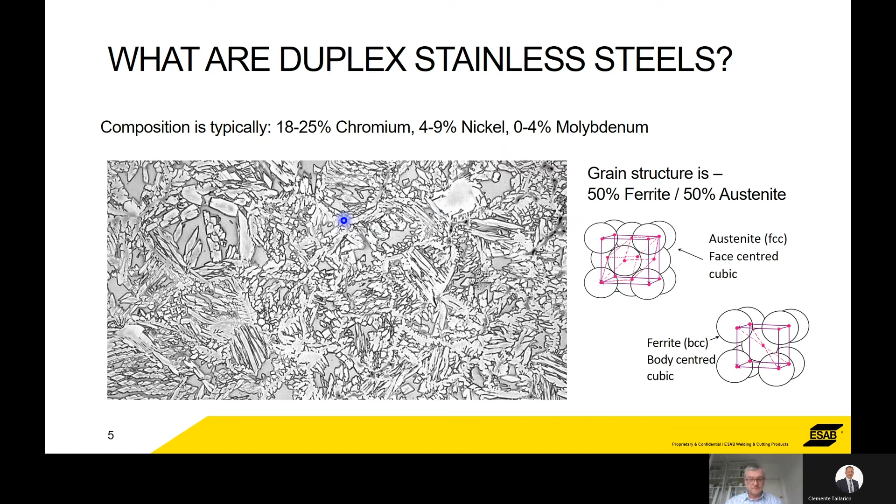We see some photographs of the effects of pitting corrosion later on, and it's a good illustration of what happens basically. So you see the measure of PRE, we start off with these things called lean duplex. Lean duplexes were invented because they didn't have so much nickel in them. When nickel was really expensive, someone developed duplexes with not so much nickel. So these are lean duplexes that have got a PRE number below 28.

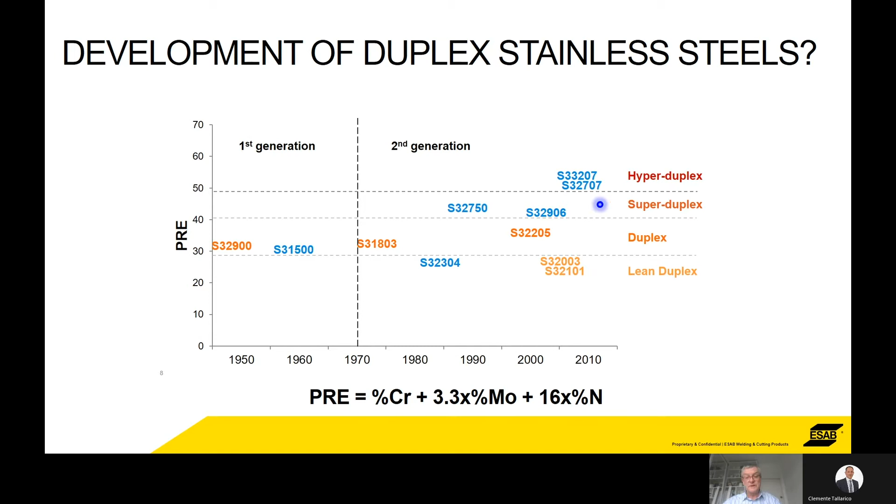And the difference between these, the higher that you go up the scale, the more resistant these things are to pitting corrosion. And similarly, the stronger the material gets. So in terms of tensile strength, we've got a big jump from lean to duplex to super duplex, and then from super duplex up to hyperduplex. Okay, and I'll show you that later on.

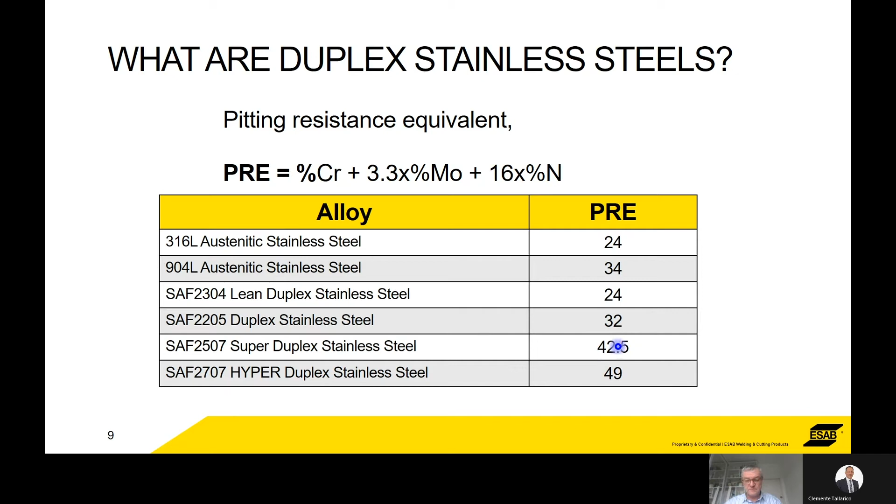So looking at this PRE number, this magic pitting resistance equivalent number, in terms of, say, a standard stainless steel, a 316L stainless steel has a PRE of 24. So obviously, it's a stainless steel. It does have a resistance to pitting. But you see, on the same scale, compared to a standard duplex at 32, super duplex at 42.5, and this hyper duplex at 49. And the effect that that has is fairly well illustrated in this photograph here.

And the thing with pitting is that, like an iceberg, underneath is where all the damage is. There's more damage below the surface beneath these pits.

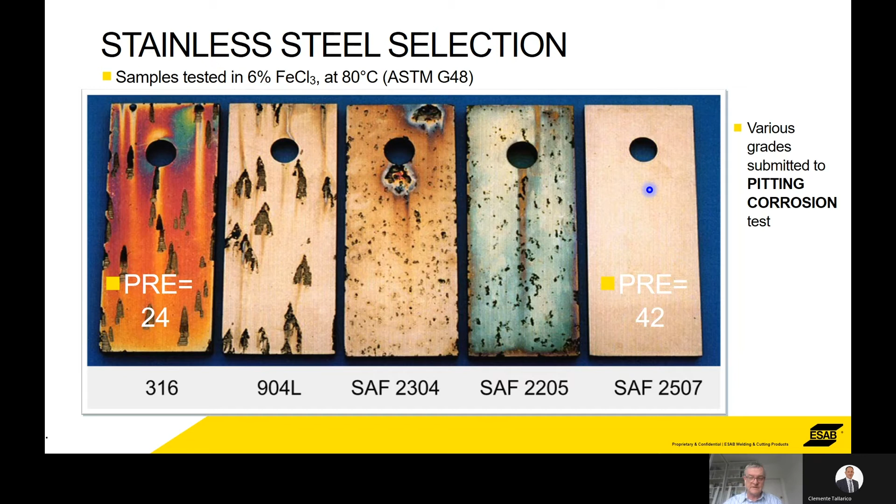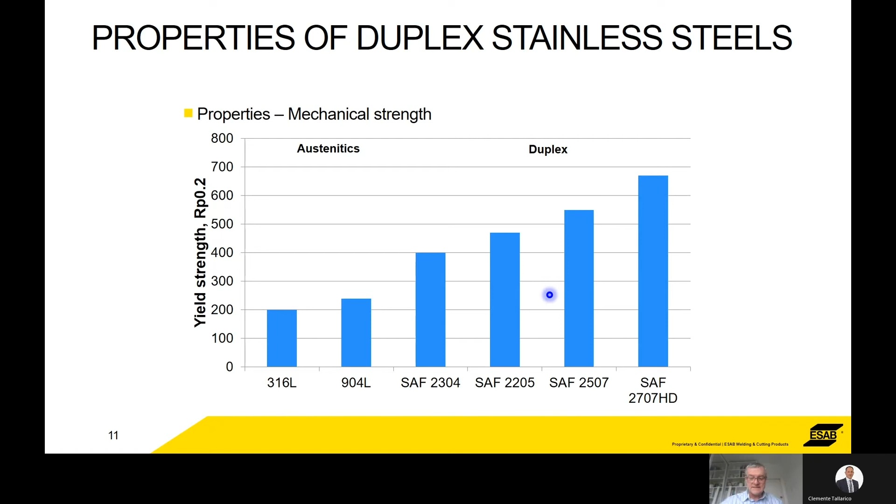There are four things in particular to take note of. The first one being the joint preparation. Stainless steels, and the more highly alloyed that they are, the fluidity of the weld pool is not so good. So the design of the joint needs to be such that the root gap, for instance, is wider, to allow the sticky weld pool to flow into the gap. If it's not taken into consideration, then there's a possibility of getting things like lack of fusion. You're not going to get the weld pool to flow into the joint.

Shielding gas. We recommend nitrogen for duplexes. Nitrogen turns the ferrite into austenite, as if by magic. So there's nitrogen in the metal. As soon as you start heating that up, the nitrogen's going to want to disappear. So you need to put nitrogen back in. Nitrogen creates austenite, so it turns the ferrite into austenite. Very important. And I've got a couple of photographs that will illustrate that.

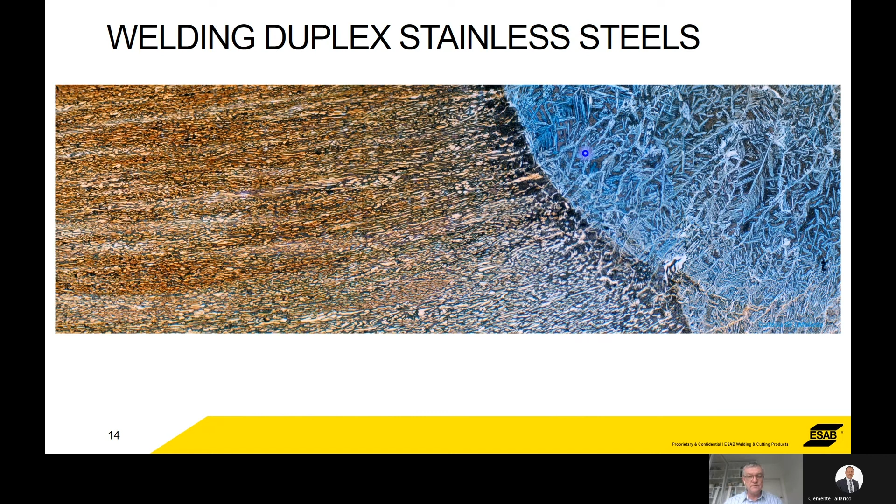Heat input and interpass temperature, critical for high alloys, in particular duplexes. Some of the numbers are quite low, and again, I'll illustrate that later on. And then what are the effects if you heat it up too much, if you cool it down too quickly?

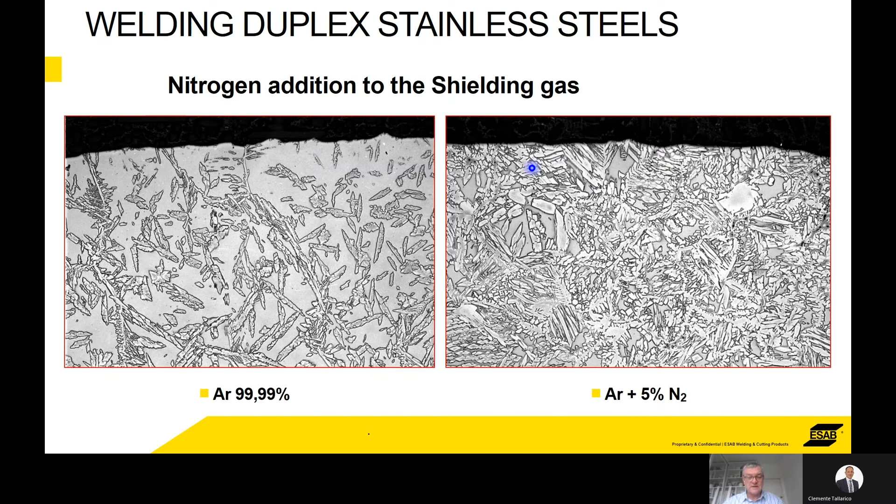Over here on the right-hand side, we've got nitrogen in the shielding gas. You've got a lovely structure, austenite, ferrite, all the way right to the end, right to the fusion line. So this is a proper duplex. It's going to have all the properties of a duplex.

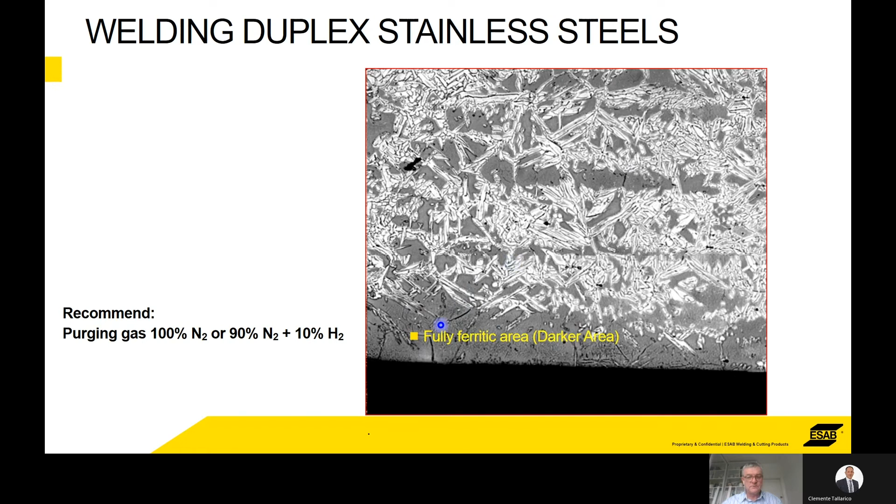Similarly, in the purging gas, same effect. If you don't replace the nitrogen by having a lot of nitrogen in the purge, then you're going to get these fully ferritic areas. So again, you've got a range here that is basically ferrite, not duplex. So you don't have the strength, you don't have the corrosion resistant properties.

In terms of heat input, there are very strict recommendations on every grade. For instance, a standard duplex, we're talking a maximum of 2.5 kilojoules per millimetre with an interpass of 150. The hyperduplex, which is obviously more highly alloyed, we're talking a maximum of 1 with an interpass of 100. And basically, why do we do that?

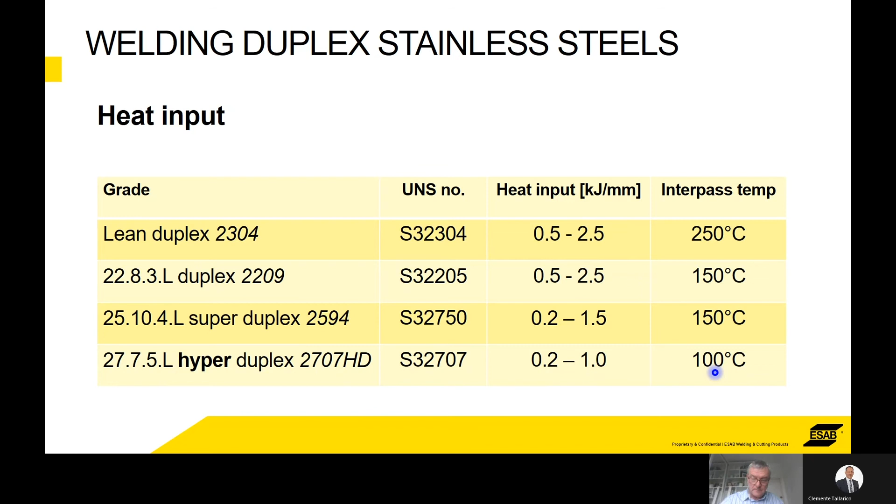And this is the reason why. So this is a sketch, if you like, of a transformation diagram. So this illustrates the phases that the steel will turn into as it's cooling down. So if you're cooling down over a long time, time is on the x-axis and temperature on the y. So up in the high temperature, this is molten. This is the molten metal as it's cooling down. So this is the weld cooling down.

The more time taken, and as you cross these lines, then this illustrates the phases that are going to be precipitated into the molten metal. So if you take too long to cool down, then you will dwell. There will be portions of the weld that will be at these temperatures for an extended period of time, and that creates problems. It precipitates these intermetallic phases in the metal.

What does that mean? So we get in these sigma phase is the big nasty word that people have probably heard of. So these dots here are sigma phase. So these are basically clumps of ferrite that have been precipitated in amongst this metal. So you have points of weakness in amongst the structure of the metal. So the whole weld is not going to be as strong as a proper duplex.

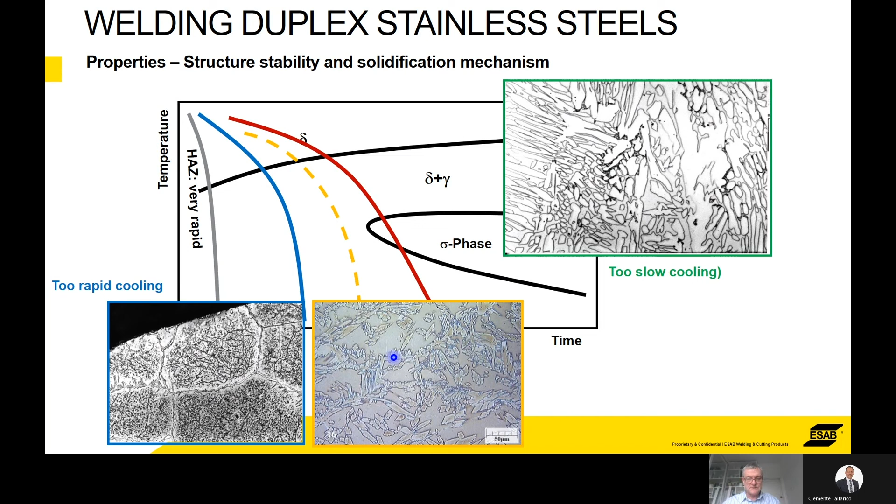This won't work. What you're trying to do is to have a nice middle of the road cooling to create this nice duplex structure. Okay, we do have troubleshooting tables for what's gone wrong in your weld. There are questions and answers if there's too much sigma, if there's too much austenite, too much ferrite, if you're having difficulty passing the G48 corrosion test, then all of these things are available if you request them.

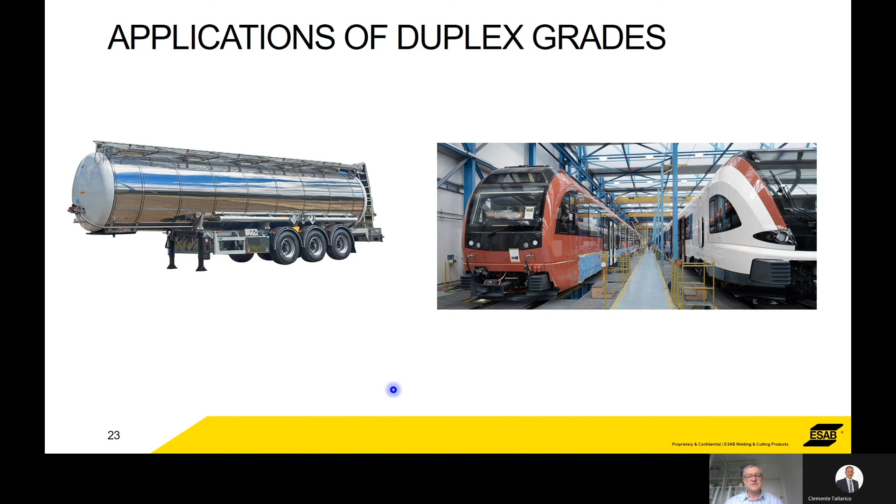So in terms of applications, the applications for duplexes are fairly far and wide. Transportation is a prime example because of the strength. The mechanical strength of the metal means that you can reduce the thickness. So you get the same amount of strength from a reduced thickness, which means reduced weight. And weight is always something that's been chased in vehicles.

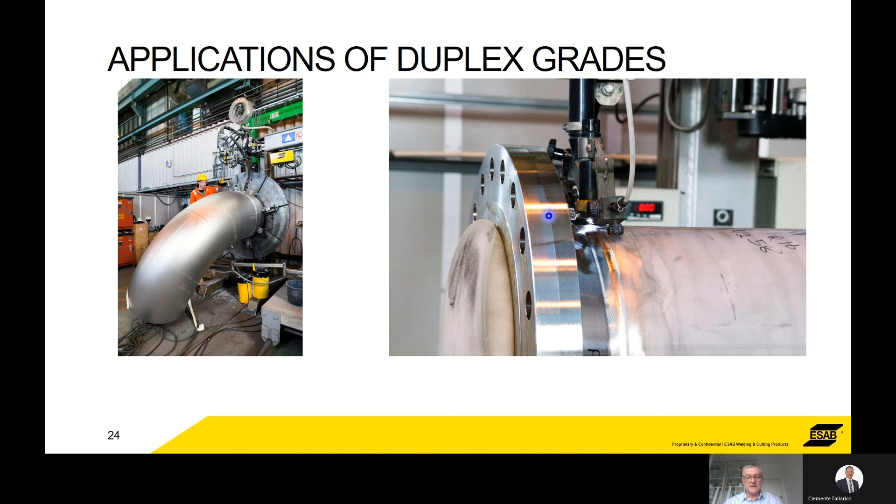Oil and gas applications, oil and gas and petrochemicals. So there's a lot of chlorides in there. Duplexes are particularly resistant to chloride attack. So there's an awful lot of applications there. You can see we've got submerged arc welding, we've got an orbital TIG, but there are a lot of applications where the mechanical strength and the corrosion resistance of a duplex is primary and key. Heat exchangers, again, in an oil refinery, so there's chlorides, providing the temperature is not above 300 degrees, then again, it's perfect.